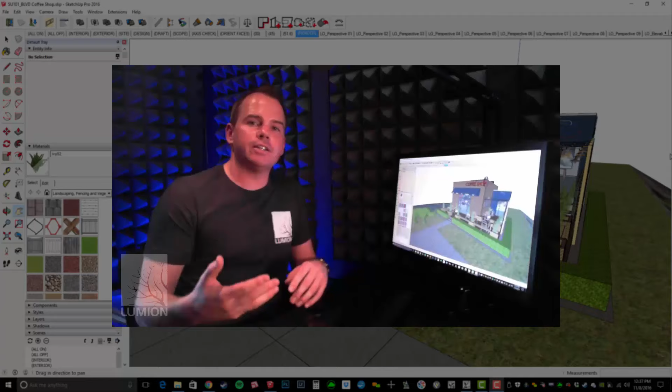Okay, so let's take a look at expediting vegetation in Lumion 7. And to do so, I want to show you the new material editor and also some of our new material types.

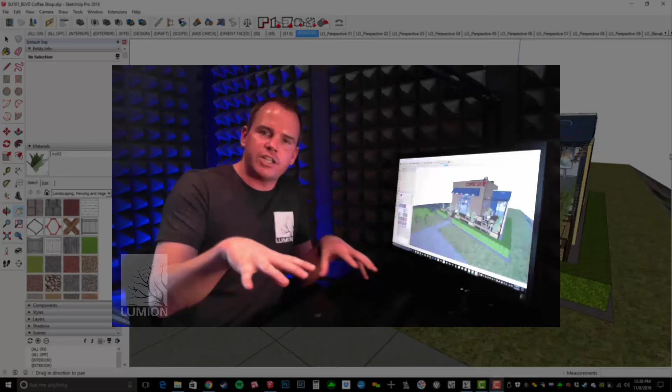The first thing we need to do is take a look at our brand new Boulevard Coffee Shop demonstration file. We'll be using this for several new tutorials in the months to come. For this one, I want to show you how we set up our vegetation textures, what we're going to work on in Lumion, and then we're going to save this model and import it.

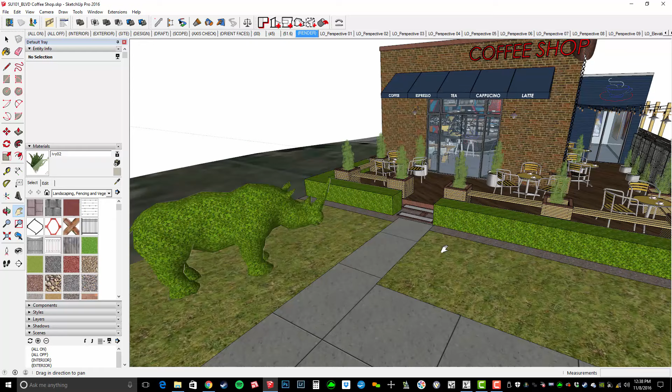So let's hop into SketchUp for just a moment, and let me show you around. This coffee shop is located in the River North District in Denver, and so the rhino is kind of the mascot for that. We grabbed this rhino model off of the 3D warehouse. Also, you can see we added a leaf texture to it in SketchUp.

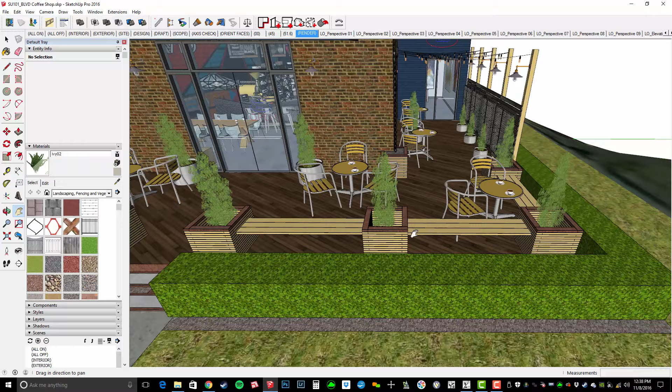Also, we have this super simple hedge that I built with the push-pull tool. And then we also have some of these 2.5D trees. These are clever trees that are built to always face you. They look good in SketchUp, and now they look really good in Lumion too. So we're going to actually import those rather than replacing them in Lumion with a separate tree.

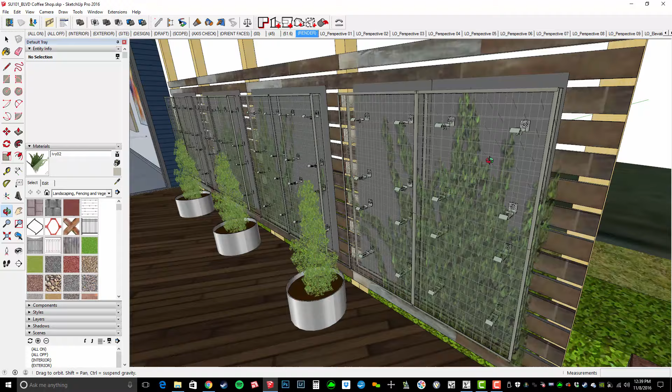Also, we do have our green screens here. The green screen is a company that creates these screens essentially that you can attach to a building, letting ivy and different plants grow on the inside of them. Pretty cool. They have all their 3D models uploaded to the 3D warehouse, so that's kind of a cool thing to grab there. For this one, you can see we added this surface with an ivy texture on the inside.

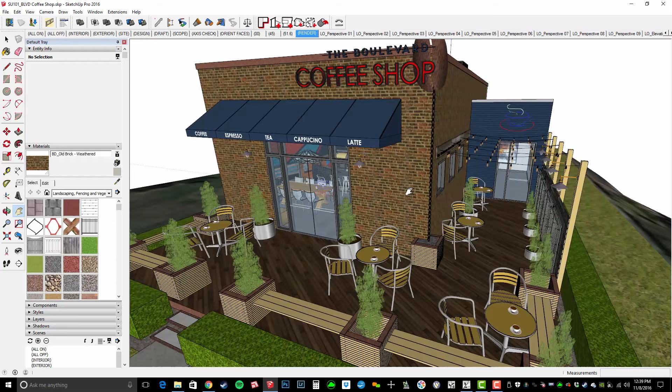The last texture I want to call out is going to be this brick, called Old Brick Weathered. I gave it a different brick than the other brick on the inside, for instance, because I want that foliage to grow on the outside only. So we made it a separate material. And then, of course, we always have our grass.

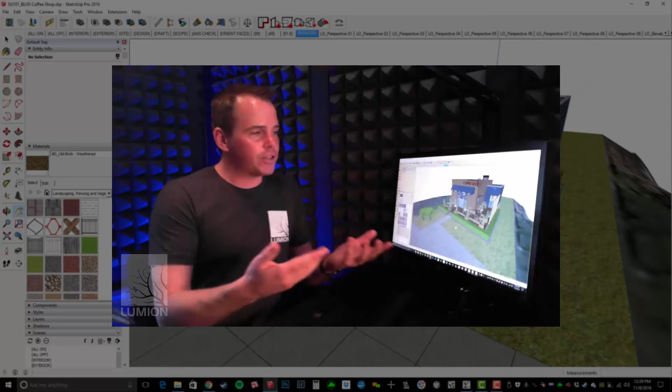So I've shown you how this model is set up, pretty simple SketchUp model, but it doesn't have to be SketchUp, can be any 3D modeling program. Just make sure you assign a texture to that surface, and once it comes into Lumion, you're going to swap that material with the new Lumion material.

So let's do a Save As and make sure I know exactly where I'm putting this. It's in my desktop temp folder, called SU SketchUp 101 Boulevard Coffee Shop. So we're good to go there. I'll save it, and we'll just overwrite that. That's fine. Also, I'm on my Render tab, which is a preset in SketchUp that lets me know this is where I want to be whenever I'm importing into Lumion.

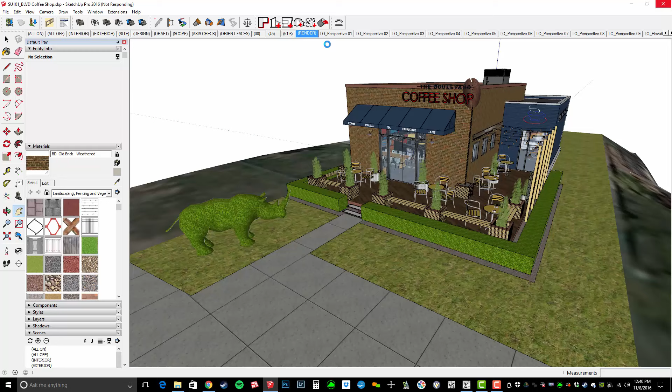So let's now hop back over into Lumion and take a look at what's going on in here. In Lumion, we're going to go to our Start tab and choose Start a New Scene. I'll click on Start New Scene, and the first thing that we want to do is import this model.

So I'm going to go to my Objects tab and click on Imports, then click on Import New Model. We're going to go to our Desktop, Temp, and here's that model that I just saved. We'll choose Open, and since I've already imported this once, that's okay. We'll just give it a different name, doesn't matter, and that way you can see the import.

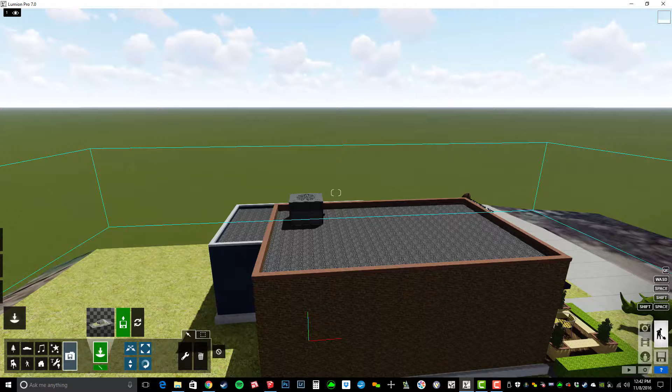Okay, so now I'm just going to simply click to place my SketchUp model in my Lumion scene. And then let's just orbit around and see what we've got here. So everything came in, but it looks pretty flat and static because we have not assigned our materials yet.

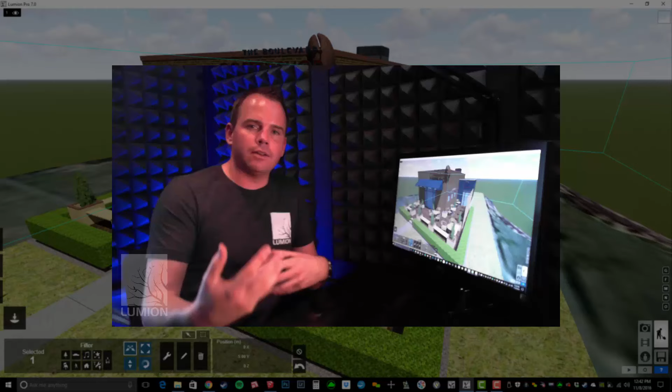All right, so one thing I like to do always is go to my Move mode and reposition this to be at 0, 0, and 0. The reason I do that is because if I want to import something else into this, I always know that I can work off of the same axes in SketchUp and be able to import it into Lumion and set it at the exact same origin point. So it allows me a little bit of flexibility moving forward. If I don't give it an exact placement, it's rather difficult to get these to line up perfectly.

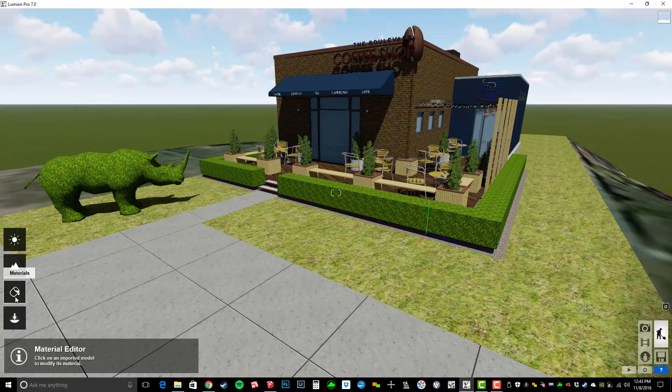Okay, so we've got our model in there. I'll click on Deselect. And now the next step is to assign some textures, so basically we swap these SketchUp materials with Lumion materials. I'll go to my materials editor tool, and I'm going to first click on the grass.

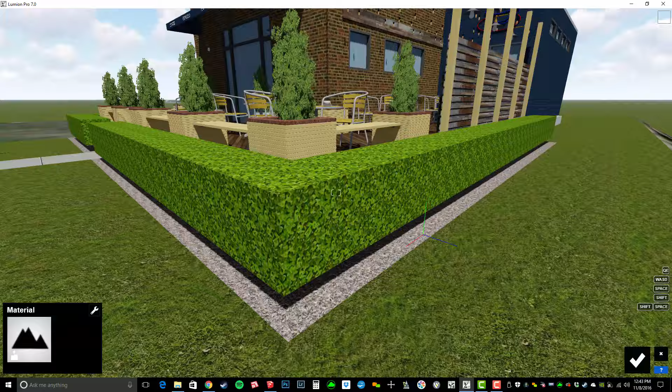So you can see the super flat, simple hedge. I click on that, go to my new Nature tab, my new material type of leaves. All I have to do is click on any one of these, and we get these 3D leaves growing out of there. So how slick is that? There's all these different setups here, lots of options for creating those hedges.

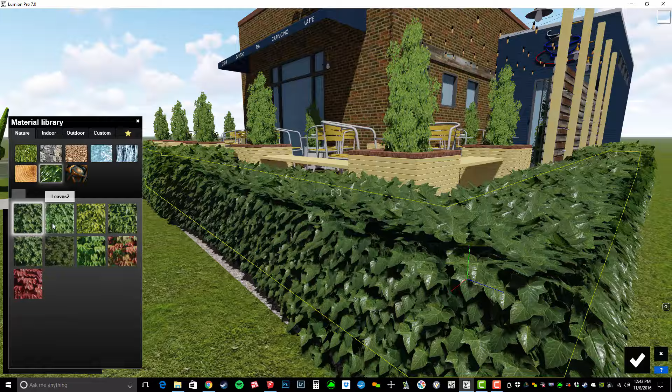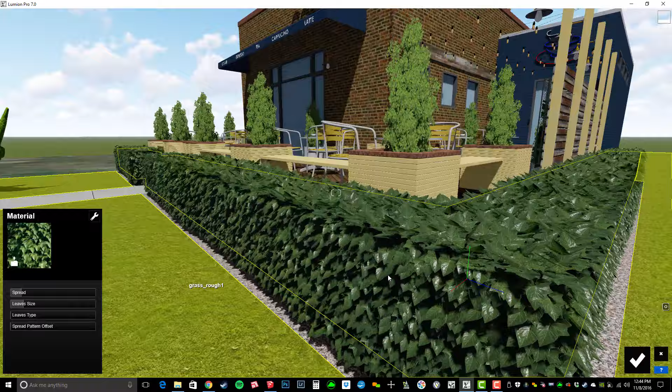If I double click on this, you can see that we get the leaf size and our spread. Alright, so that's pretty cool. Maybe we'll choose something like that, looks pretty good. And then the leaf size comes down, and the spread is just enough to make it look interesting. So that's pretty cool there.

Let's go over to our rhino. We can click on this rhino. So what we're getting at here is that you can create these extremely sculptural shapes in your 3D modeling program, assign a leaf material, and then make them into these really nice landscape elements.

So we'll go over to our nature tab, and under leaves, we'll just choose a different leaf type. Double click on it, and let's just drop the leaf size to make it a little bit smaller. And then you can see that spread, kind of like how much do you want it to grow out and overgrow. So maybe just a little bit is kind of cool. And then you can see we've got that super detailed look to it. So that's pretty cool, the ability to make these extremely sculptural landscape elements.

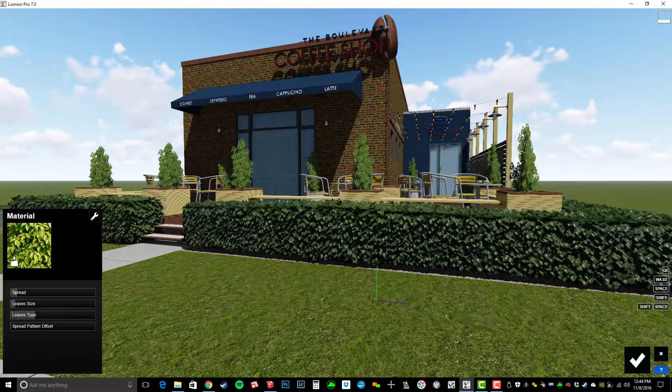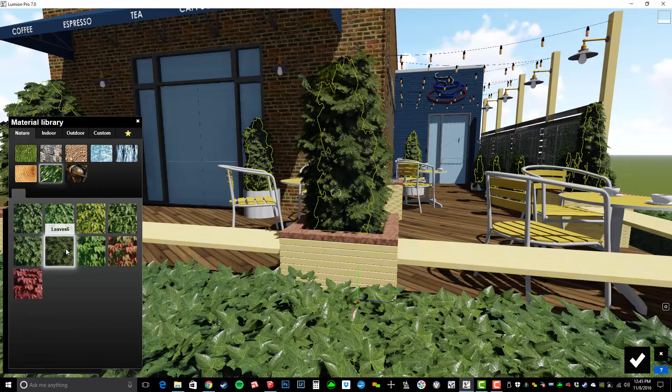And then also here we have these 2.5D trees. You can see how it's kind of locked in place now in Lumion, but that's okay. If we just go over here and click on that guy, we can go to our nature tab, leaves, and we also have these pine type leaves too, so that's pretty cool. Maybe we can go with that. We'll just double click on it, choose the leaf size, knock that down pretty far, and then the spread can go crazy or not. And then just like that, we've got some pretty realistic plant life that goes in there. So not too shabby, right?

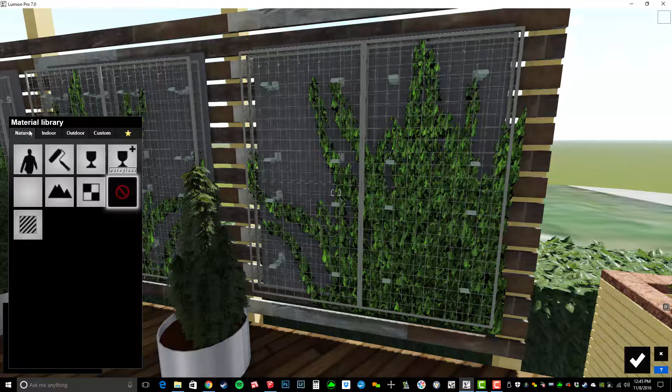Alright, so let's keep on moving. We also have our green screens here. And so in our green screen, I can click on that ivy, and we'll go over to, let's see, did I get that? Yeah, IVO2. We'll go to nature, leaves, same deal. We'll choose leaves 4. Let me back out of here, we'll get a good look at it.

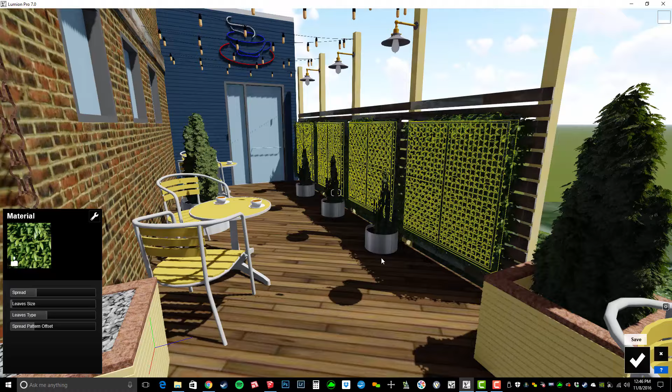Seems like oftentimes I like to knock down the leaf size like that. And the spread is what makes it go into 3D a bit. And then the spread pattern offset is kind of what gives it that a little bit more, I guess, randomness essentially. So I just clicked on save to lock in those changes, but that gives it a nice natural look to that green screen there.

Okay, so now the last thing I want to show you is the new material editor. So the leaves don't have all of the translucencies and the different foliage and weathering effects, but what we're going to do is add a standard material to our brick, and then we're going to make some ivy grow up the wall, and then in the next tutorial we're going to get into weathering. So let's take a look at this.

Alright, so over here I can click on my brick like that, and we'll go to our standard material just like that. And here's our new material editor. You can see that everything's pretty familiar. We can drop our gloss and our reflectivity for brick. We can create a normal map.

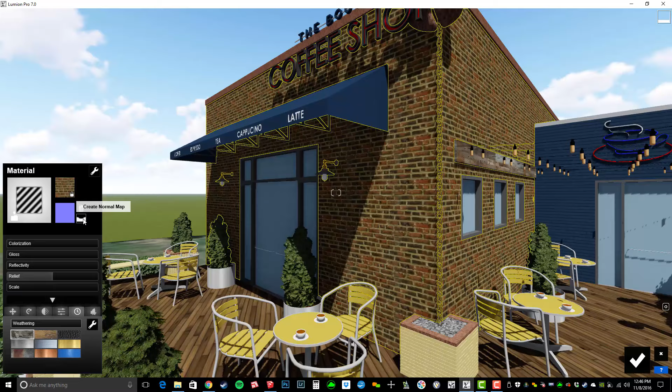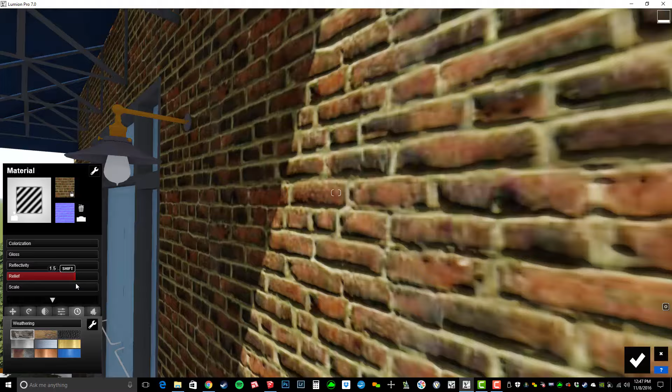If you zoom in a little bit, I'm holding the space bar to zoom slow. You can see that the relief on that, if you were to flip it, see that direction is not correct for brick. If I flip it, that's the correct direction. So now I get enough relief where it just kind of gives some depth to that brick. That looks pretty good, so it makes kind of a cool brick wall.

Now here's where our new material editor comes into play. You can see here you can collapse it, and we have all of these sub tabs. So these are the things that you used to have to click on, I think it was an advanced drop down, and add these different advanced properties to the materials themselves. But now they're all available on these sub tabs. So you've got your position, orientation, transparency, and weathering, and settings, weathering, and foliage.

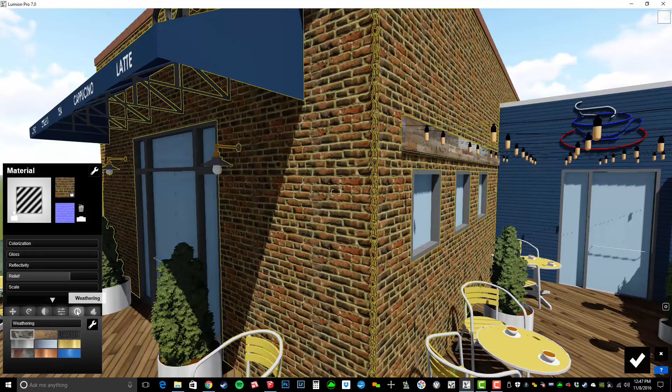So for foliage, watch this, this is really slick. I'm just going to go and we're going to adjust our spread up, and there we go. Alright, so for any setting in Lumion, if I hold shift, it goes a little slower. So that kind of allows me to hold shift and just kind of inch the ivy right up the wall like that. And let's drop our leaf size down.

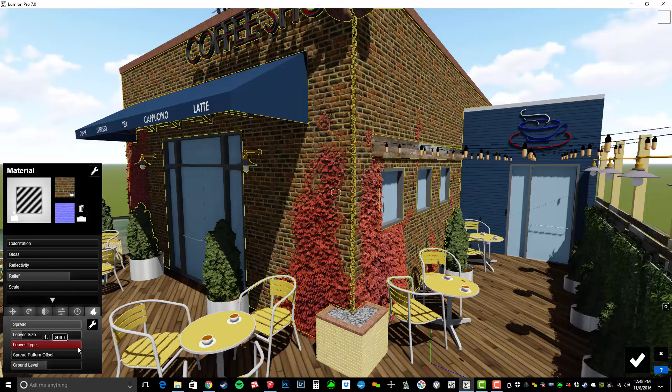I think it should be a little bit lower. And then our leaf type, we can choose something different. Like that looks a little bit more reasonable for where I'm at. The spread offset pattern, again, gives it that randomness, and maybe just dial up a little bit more on that spread like that. There we go. That looks pretty cool. Alright, so I'll say okay.

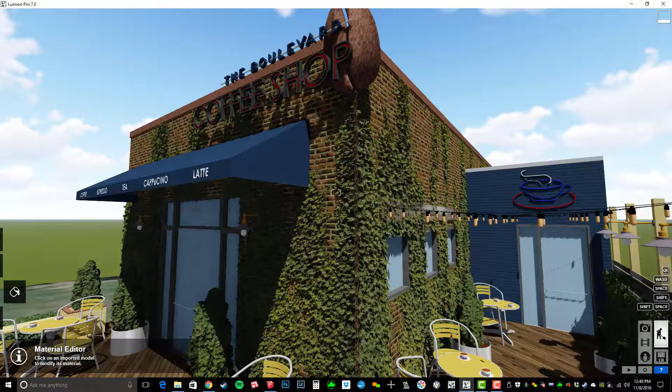So that is our new material editor, and some of these new foliage effects that you can assign to a material. Just gives a lot of detail. I mean, to get an image with ivy crawling up the wall, I used to use a lot of Photoshop. It was just difficult, it was a tricky thing to do, and it is extremely easy now in Lumion 7.